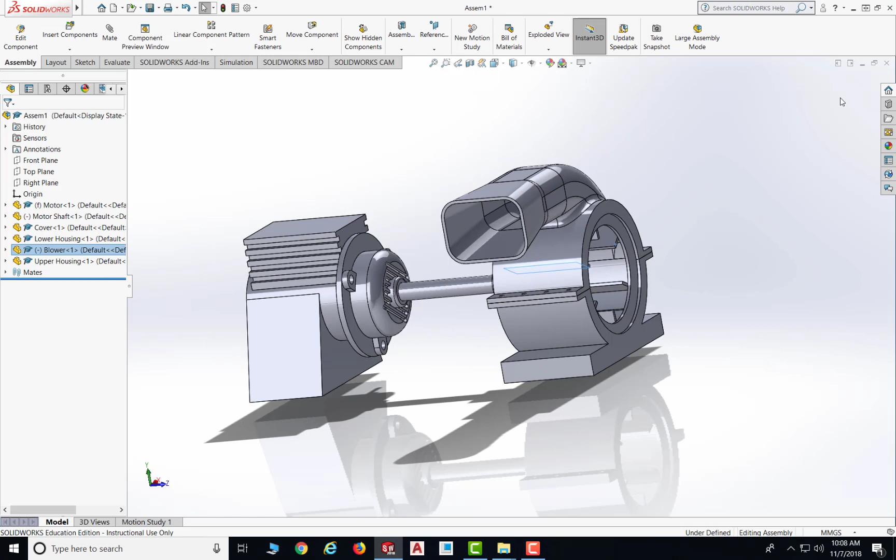So now let's try working on this part. So I'm going to close this part, and I don't save it. And now I am going to start the new one. So I'm going to start a new assembly and say OK for that. And the units here won't matter because we already have all parts. So let me go to the part.

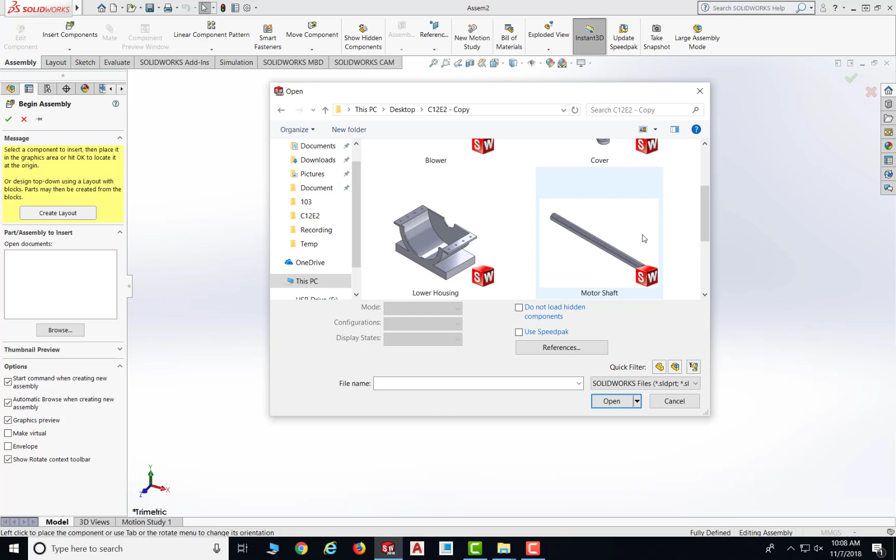So like I said, I am going to bring the motor as the fixed part. So this is too small, so let's make it bigger. Right click the mouse and do view and do extra large icon, so I can see which part is which. So I'm going to bring the motor first and say open and drag it down here as my first part. And the first part is always the fixed part.

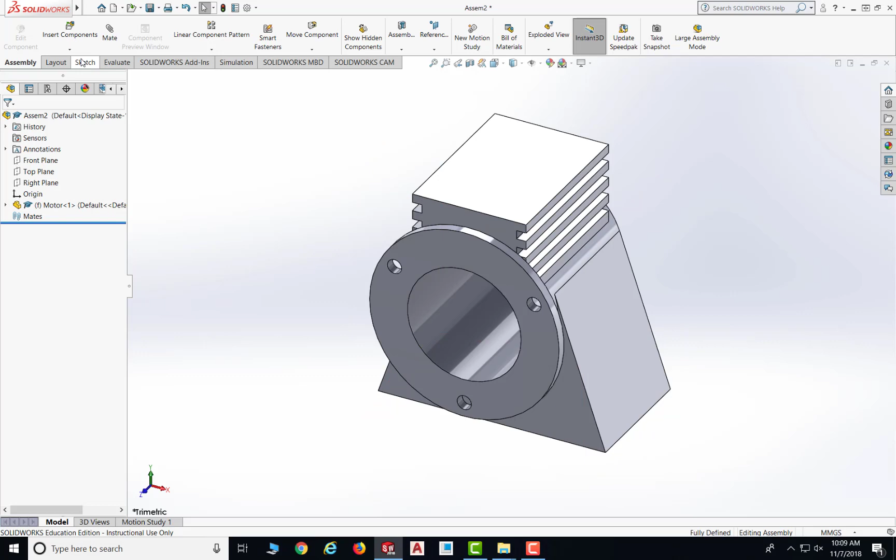And the next one, I'm going to bring the shaft. So I go insert components and find the motor shaft, and say open for that and drop it down here. And now we are going to work on the assembly. So as you can see, the shaft is a little bit different. So when you assemble, make sure the side that has a groove, you put this side on the inside of the motor.

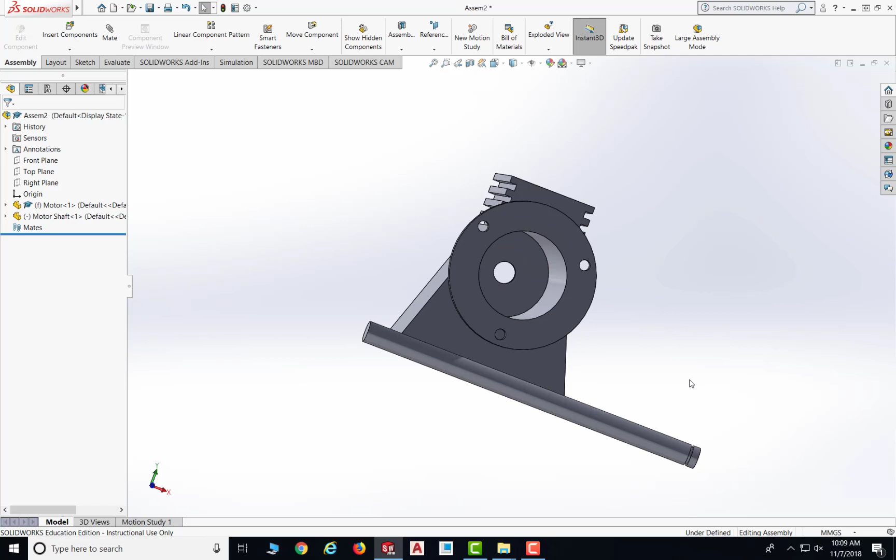So as our first mate, I am going to make this surface at the end coincident with the surface in the back. Then I am going to make these two circles concentric. So that's about the shaft. So let's go ahead and do that.

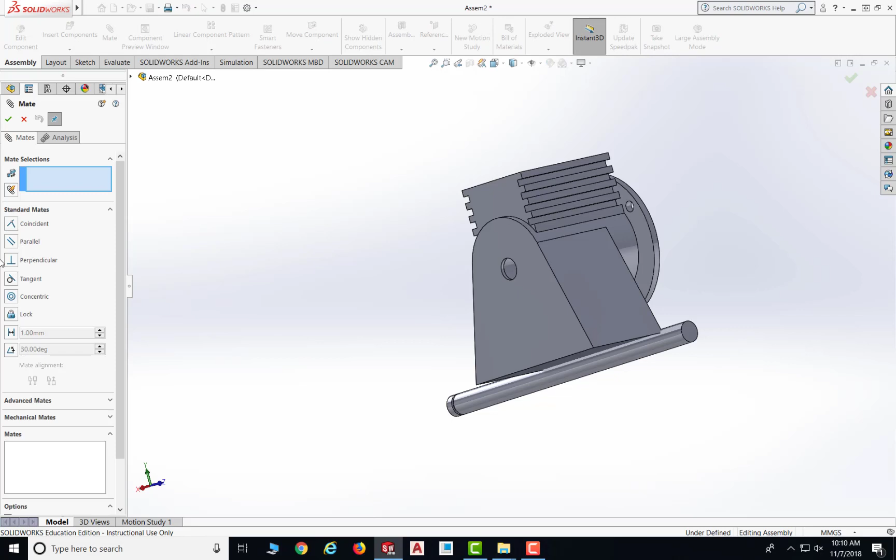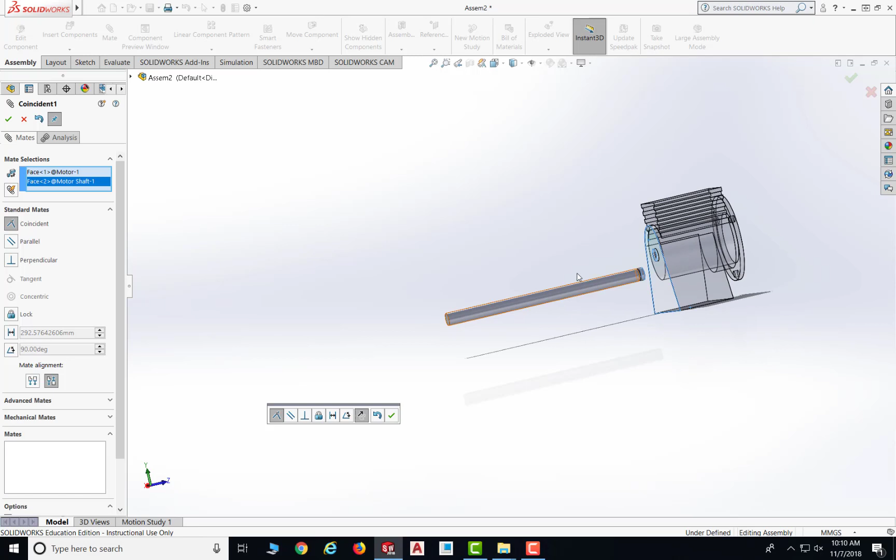So first of all, I add a mate and select the bottom surface here. So like I said, it has a groove. Make sure you select the right side instead of the other side. So select the surface here as well and make them coincident. So apparently this is the wrong direction because the shaft is supposed to go the other way. So I am going to flip the direction and say OK for that.

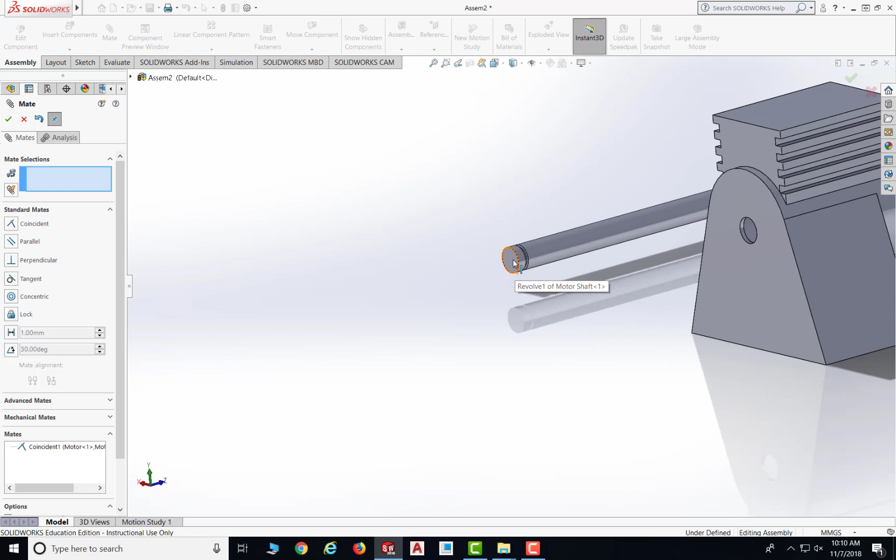And after this, as you can see, the surfaces are coincident. So I can only move it in this way, but it's always lined up with the surface. And the next mate, I am going to make these two circles concentric. So instead of selecting the circle only, I am going to select the body of the part. So I select the body and say concentric and say OK with that and say OK with the mate.

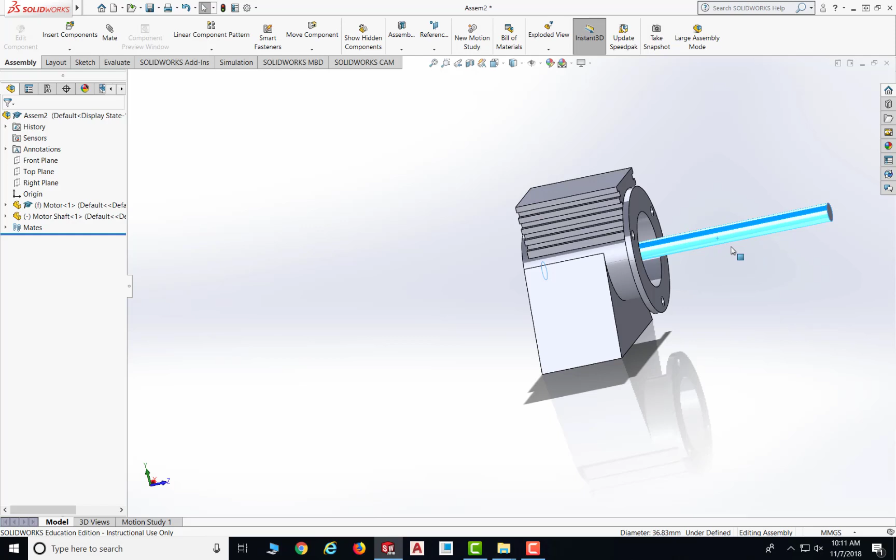So after you assembled that, as I said, the shaft is supposed to be able to rotate, so there is a minus sign in front. If you really don't like the minus sign and want to get rid of that, what you could do is right click the motor shaft, I'm sorry.

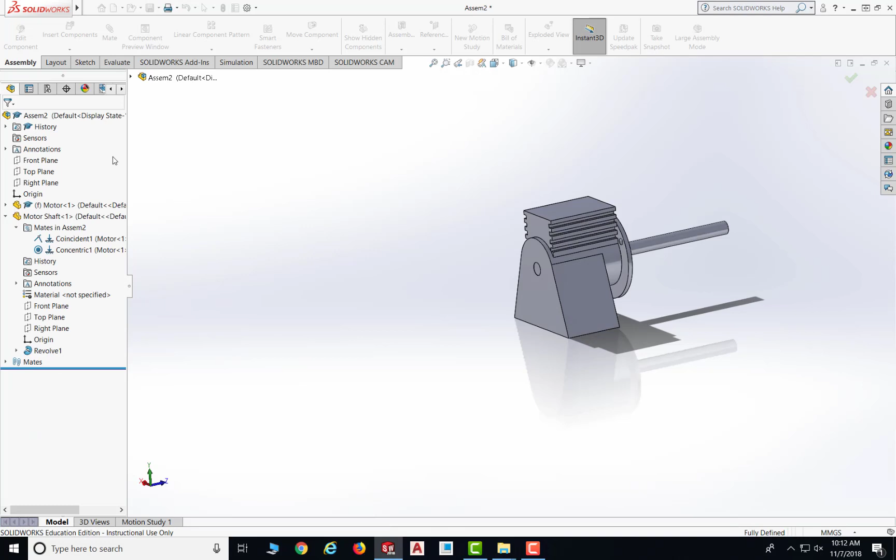So first of all, you expand the motor shaft and go to mates in assembly, and you should have the concentric you just made. Click that and edit the concentric, and there is an option, lock rotation. So you could check that and say OK with that. And by doing that, the minus sign will disappear.

Okay, because you fix the rotation. But in this moment, we'll just leave it open because the shaft is supposed to be able to rotate. So this is a part, and we had two parts here, and now it's a good time for us to

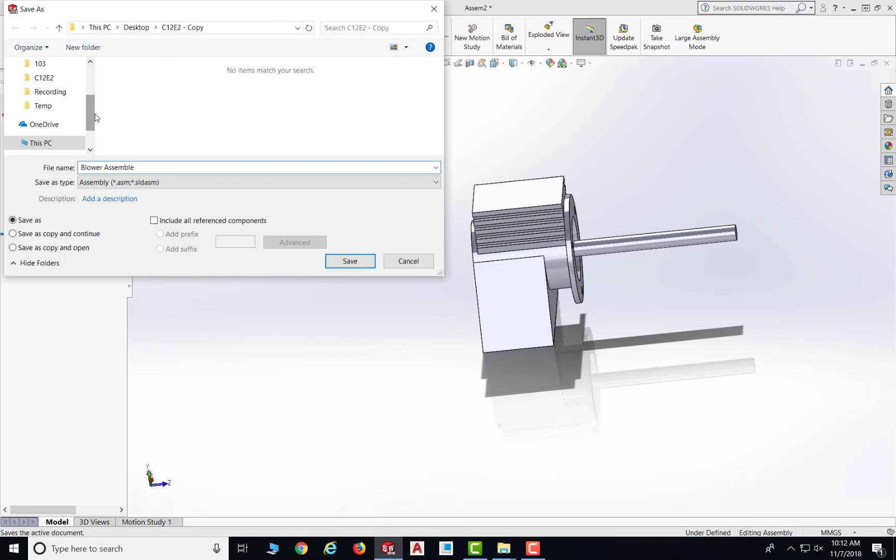save the work. So I click save and save the assembly, and let's name it as blower assembly. B-L-O-W-E-R, blower, A-S-S-E-M-B-L-Y. Blower assembly, and save it.

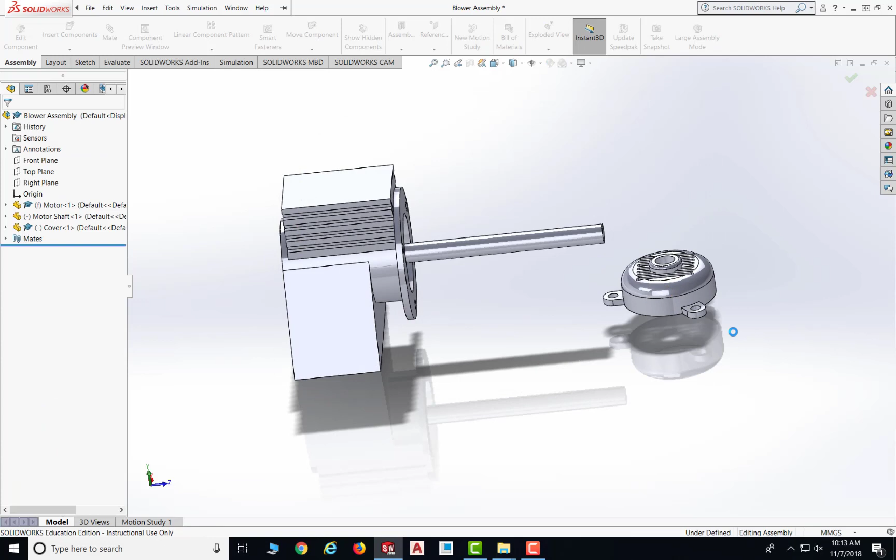Okay, so next one, we are going to bring the cover. So insert component here, and let's bring in the cover. So this part, the cover, and say okay, and let's drop it down here. And now I am going to make a few mates as well. So first of all, I'm going to make the bottom piece and this surface to be coincident. Then I am going to make this hole concentric with this hole, and this hole concentric with this hole. So 3 mates.

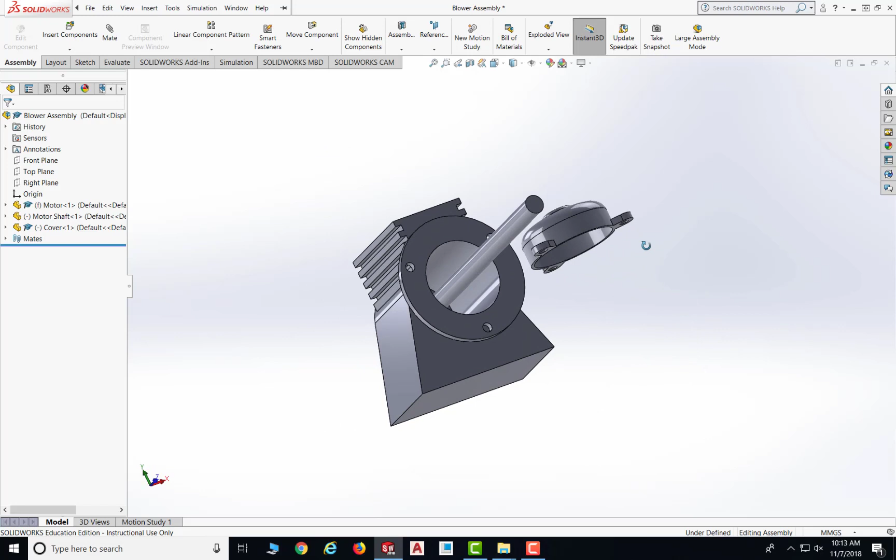So let's go ahead and do that part. So I'm going to do mate and select the surface at the bottom, and select this surface as well, and make them coincident, which is correct, and say okay for that.

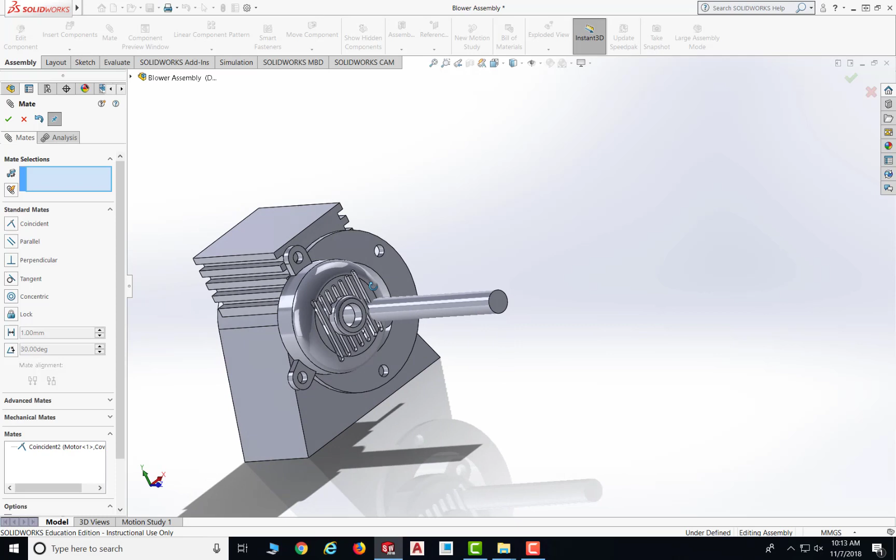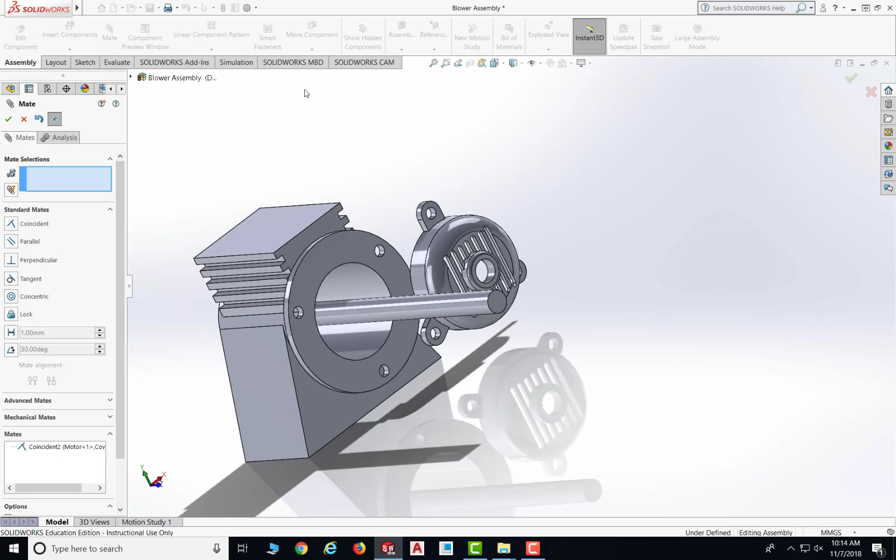And now let's look at the part, and I am going to select this hole to here. You could select this to here as well, so it's up to you. I would put this one here and make this thing kind of parallel. It looks kind of nice, but it doesn't matter. So anyway, I am going to select this hole.

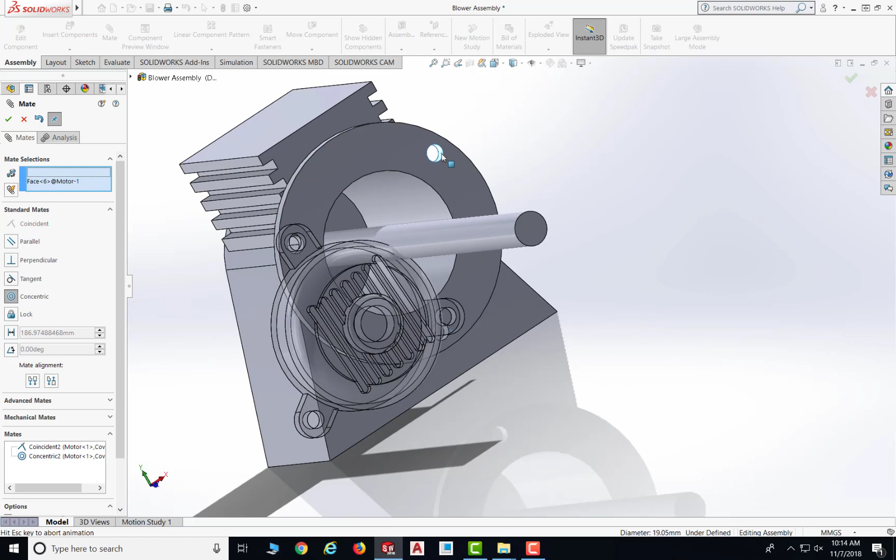And this hole, make sure you select the body instead of just the circle, and do a concentric and say okay for that. And let's add another one, this body here and this body here, and they're concentric, say okay as well. So by doing these two, this one is going to be fixed automatically. So the part should be fully defined. Okay, the part is fully defined right now.

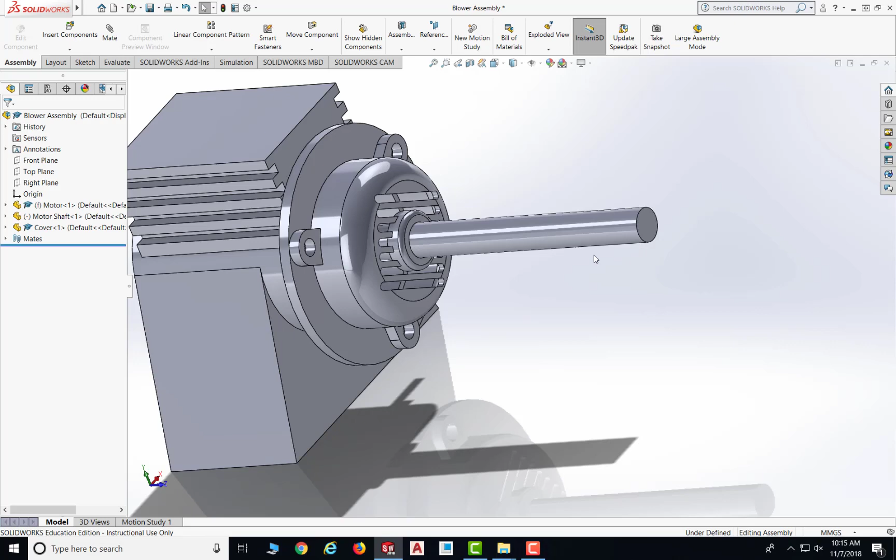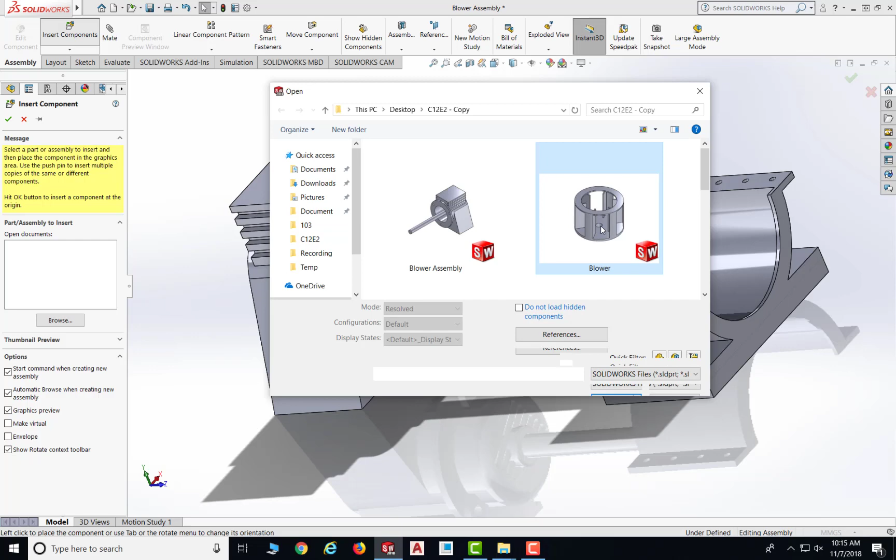Okay, now let's add one more part. So at this moment, I'm going to bring the lower housing first. So insert component here. I'm going to bring the lower housing, which is this part, and open it and put it down here. And after that, I am going to bring another component, that is the blower. So insert the component and select the blower and open that and drag it down here.

So this blower part is supposed to be connected on the shaft. Okay, connected on the shaft. And also, this blower is supposed to be assembled into this cavity. So it's supposed to be in the middle. So this dimension is actually a little bit smaller than the housing, so the blower can rotate. So what I'm gonna do is I am going to put the blower in the center of the lower housing.

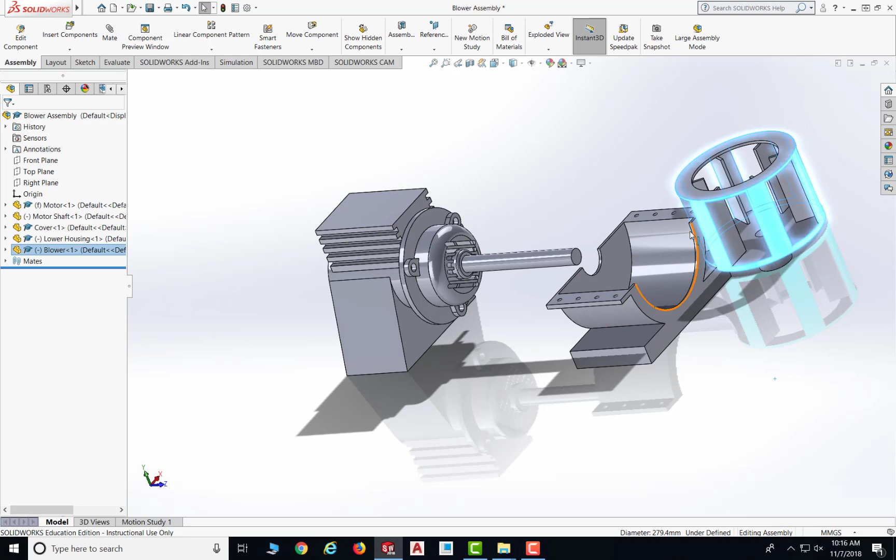So no coincidence, because like I said, the height from the top to the bottom is going to be slightly smaller than the distance from here to the side, so the blower can rotate. So I'm going to put the blower in the middle of the lower housing. Okay, so I'm going to add mates, and besides that, I am going to make those two holes concentric. Then the part should be fully defined. Oh no, it's not fully defined because the blower should be able to rotate. Okay, so anyway, I am going to add a mate.

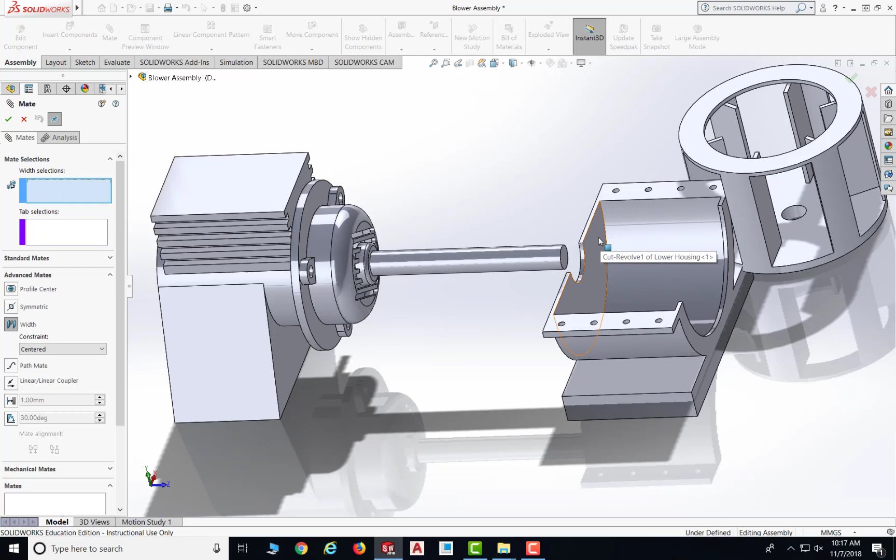So first of all, I am going to do advanced mates, because like I said, I'm trying to put the blower in the middle of the lower housing. So I'm going to select the width. Okay, select the width and click that. And now I need to select two types of surfaces. So the first one, the width selection, I'm going to select this face, the inside one, and also the face on the other side of the lower housing, and that's for that.

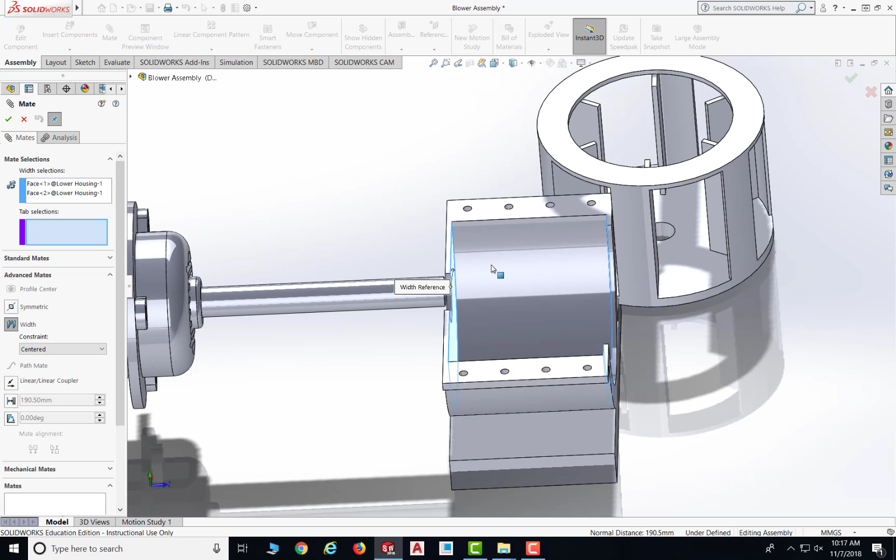And the next one, I'm going to select another two faces to be mating together. Since I selected this surface first, I want this surface that is close to this surface, so I'm going to select this surface first and this surface second, so they are going to mate together. So make sure it's centered, then say okay for this.

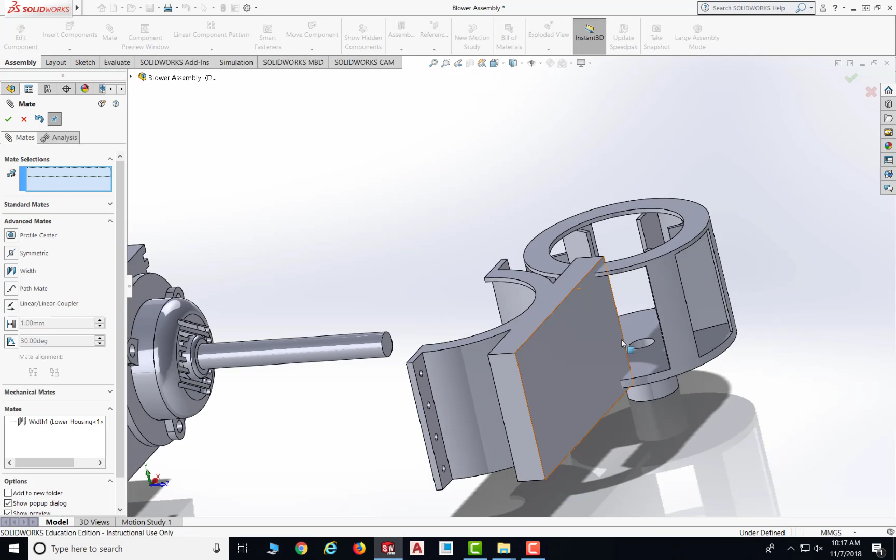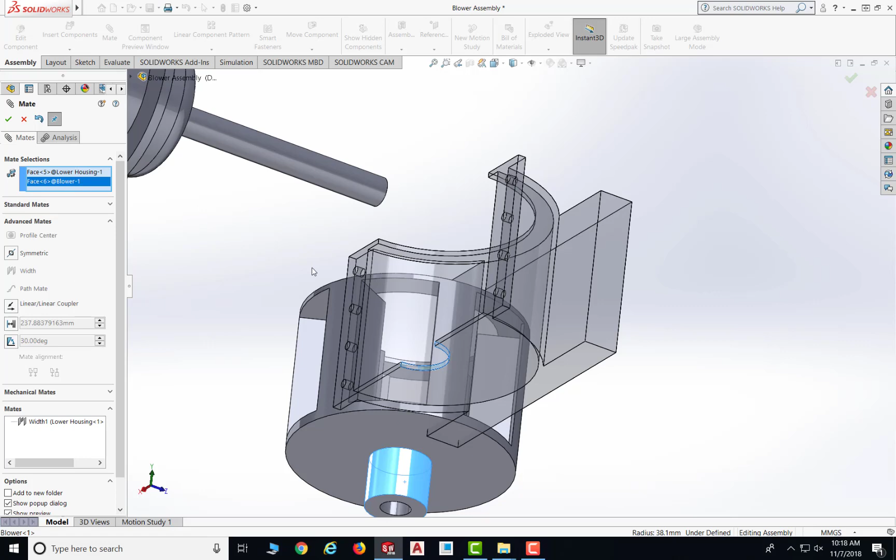Okay, so by doing this, as you can see, it's in the middle, so it's hard to say right now. So I'm going to add another mate, which is the concentric. So select this part, this surface, as well as the surface of this part, and it's going to be concentric. Okay, it does not recognize. So let me take this out. Oh, it's still under advanced possibly.

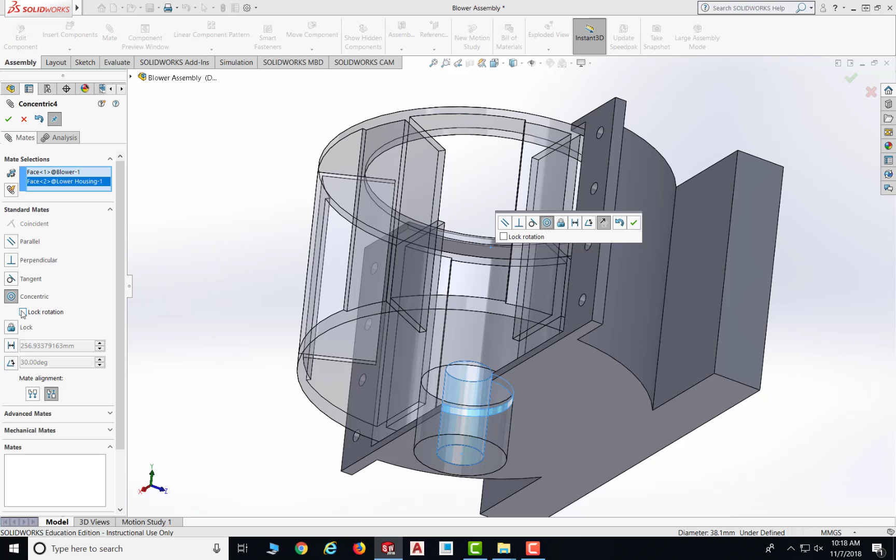Okay, so I'm going to say no for that and do a mate again, and I'm going to select the hole this time. So this hole and this surface here, and they are concentric. So if you want to lock that, you could, but I don't think you need to, and say okay for that. And now this is the part.

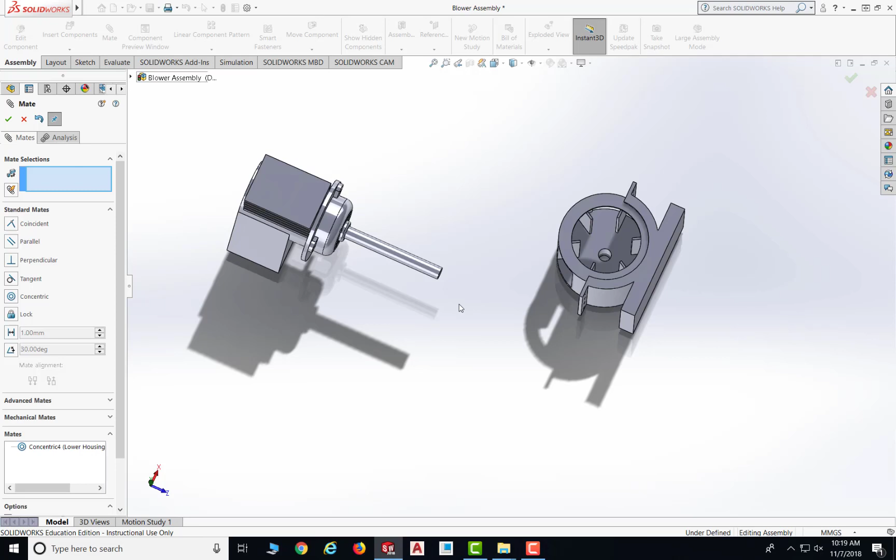And the next step, we are going to make the shaft. So the surface of this end is coincident with this surface. Okay, make those two surfaces coincident. So I'm going to select the end of the shaft and select the surface, the surface here, and select this tool.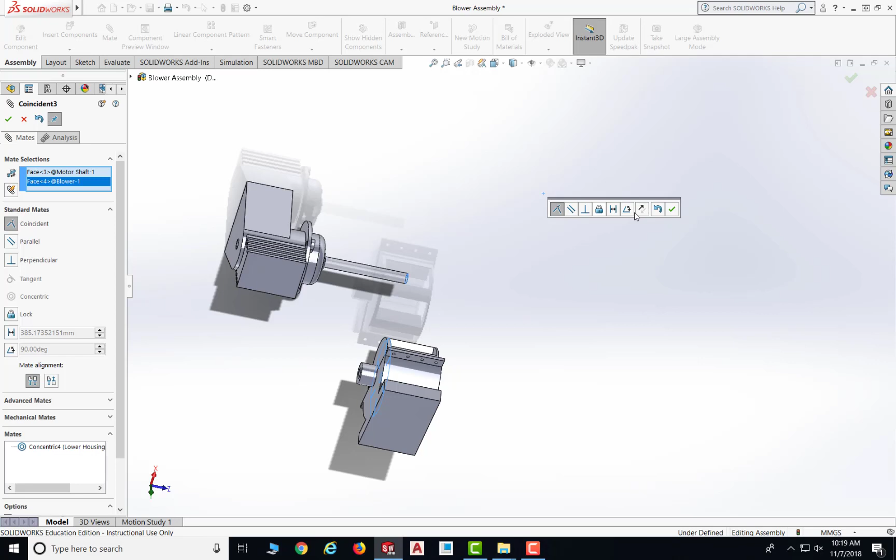So apparently the direction is incorrect, so I'm going to flip that. So it's flipped in this way. Looks right so far. And let's say coincident and say okay for that.

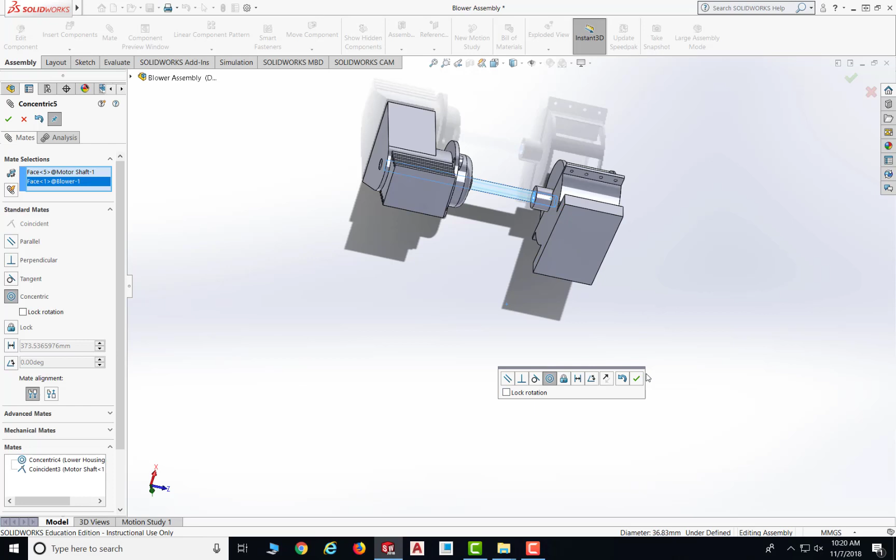And the next thing, I'm going to make the shaft and the hole concentric. So I select the body of the shaft and select the body of the hole and say they are concentric. And like I said, I don't need to lock that. If you want to, then you could. And now it's not locked. Okay, so the part could rotate in this way, which is not supposed to be.

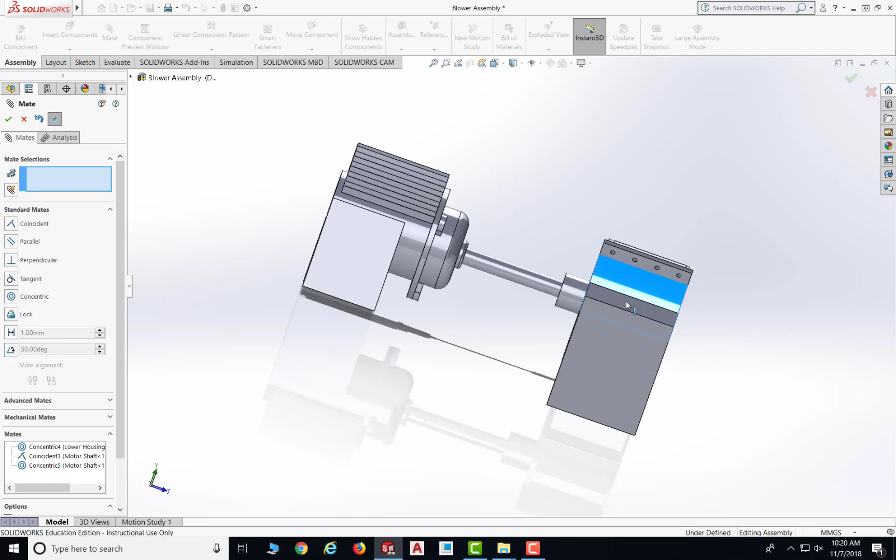Okay, so now I am going to select those two surfaces and make them parallel, because the part is not supposed to rotate in this way. So now I am going to select this surface as well as this surface and make them parallel.

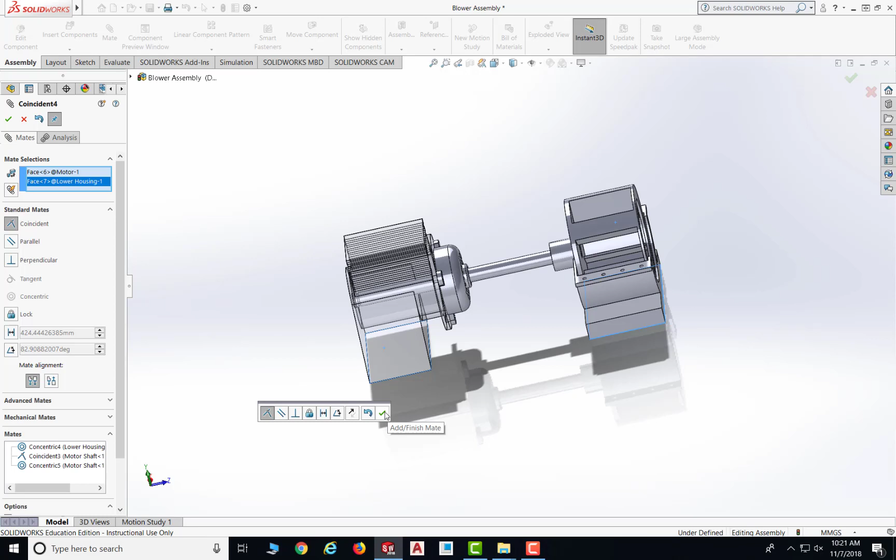Okay, so when you do parallel, make sure they are in the right direction, because parallel could be flipped. If it does, then you could flip the alignment. So right now it looks good and say okay. Oh, I'm sorry, it's supposed to be parallel. Like I said, okay, it's in the wrong direction. So let's see if we can flip that.

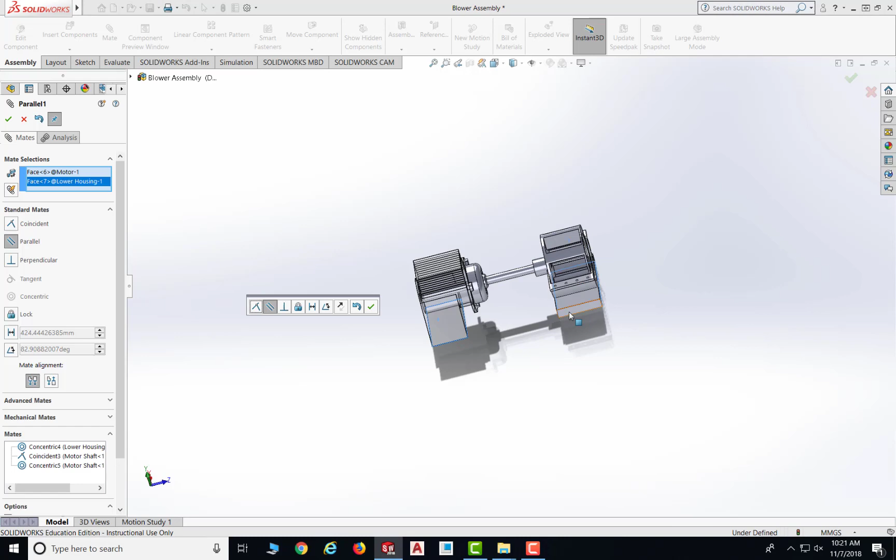So if you click here, mate alignment, then you could flip the directions. Okay, now this is good. So I say okay for this. And now let's say okay for the mate. See if it's fully defined. So the lower housing, okay, it's fully defined, which is good. And let's save the work.

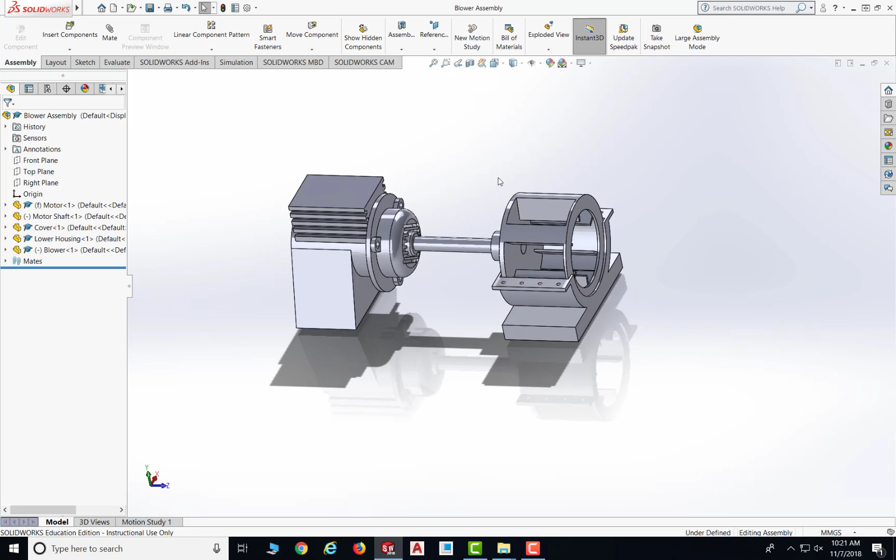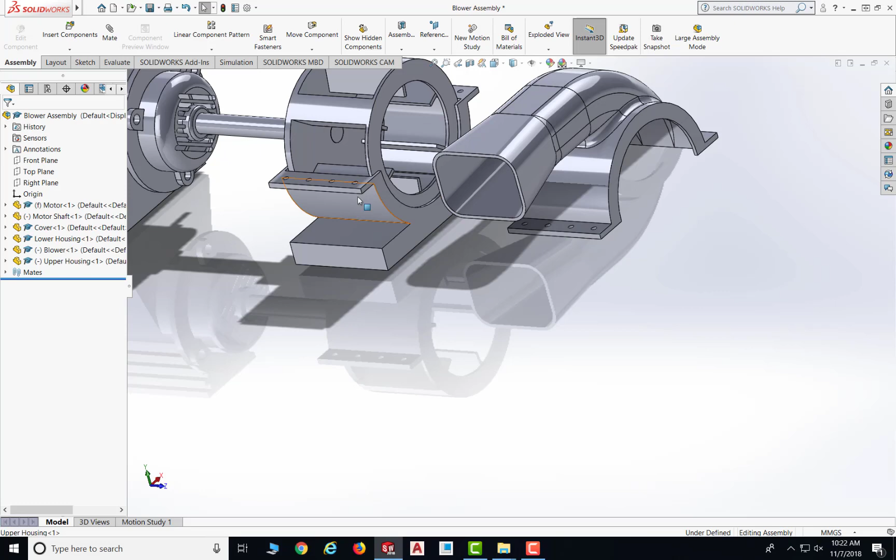In the next part, I'm going to bring in the upper housing. Okay, so insert component and find the upper housing, which is this part, and open it and drop it down here. And I'm going to add a few mates. So first of all, I'm going to make the bottom surface coincident with this surface. Then I'm going to make two holes concentric, and also those two holes concentric. So let's go ahead and add mates for them.

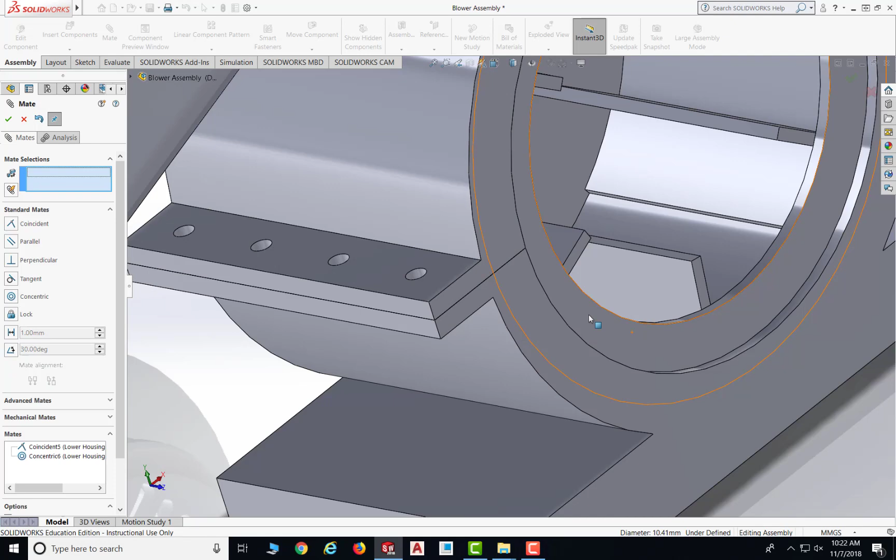So select the surface, also the bottom surface, and they are coincident, which is correct. Then now I'm going to select this hole here, the body, and the body of the hole, this one as well, and see they're concentric, and say OK for that. So by doing this, the part can still rotate. So we need to select another hole to make them concentric.

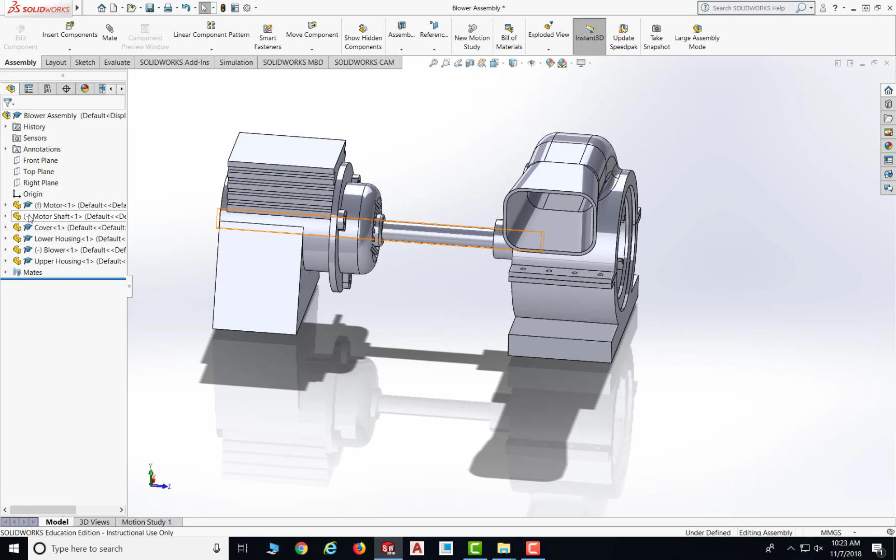So let's select this hole here and this hole here, and they are concentric, and say OK for the part, and say OK for the mate. So the upper housing is fully defined as well. So by doing that, only the blower and the motor shaft are underdefined, because they are supposed to be able to rotate. And other parts should be fully defined.

Okay, so after you're done, then save it in a good view and save the part and rebuild it and save the document. And that's all we have for the blower assembly.